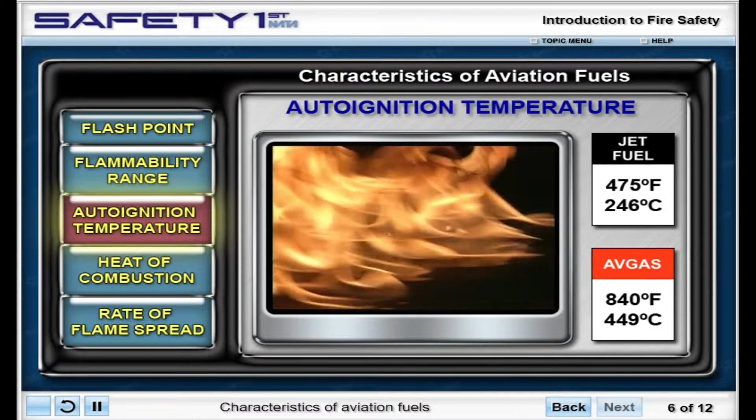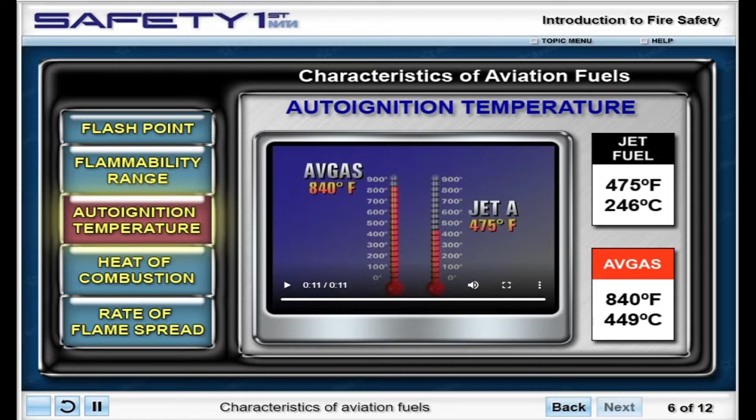Autoignition is the temperature at which fuel will automatically ignite without a spark or outside ignition source. The autoignition temperature for most avgas is 840 degrees Fahrenheit or 449 degrees Celsius. Jet A autoignites at 475 degrees Fahrenheit or 246 degrees Celsius.

There are a number of components on or near an aircraft that can generate temperatures high enough for autoignition to occur. It is important to ensure that fuel or fuel vapors cannot touch any surface or device that is at or near the autoignition temperature of the fuel.

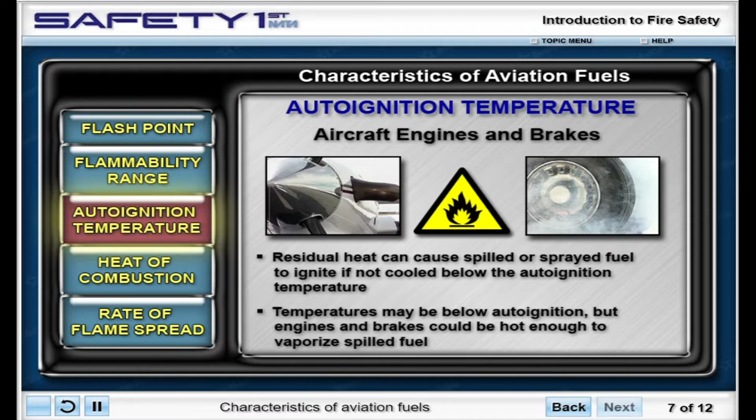The residual heat present in engines and brakes can cause spilled or sprayed fuel to ignite if they have not cooled below the autoignition temperature. The visual appearance of aircraft components is seldom a good indicator of temperature. Therefore, consider all surfaces to be above the autoignition point. Even when the temperature has dropped below the autoignition level, the engines and brakes may still be hot enough to vaporize spilled fuel. All ignition sources, such as static electricity, become extremely hazardous in the presence of flammable vapors.

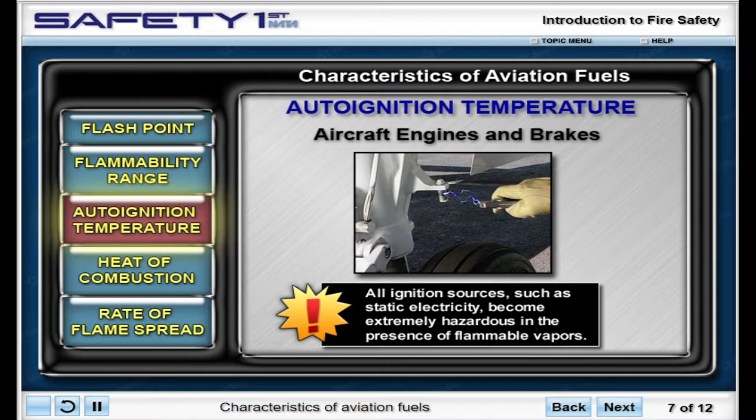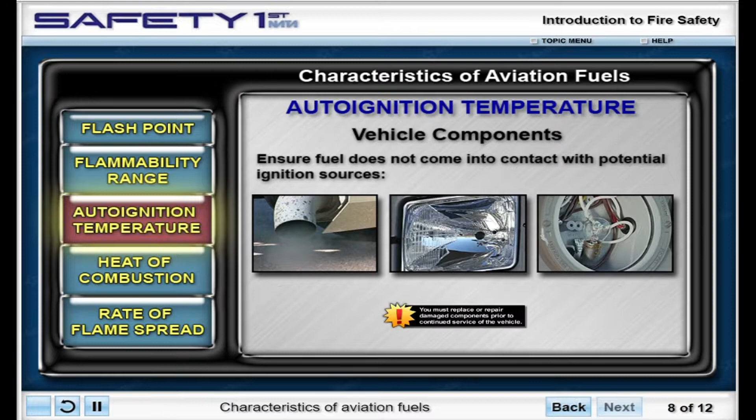Vehicle components, such as exhaust pipes and manifolds, are potential sources for autoignition of aviation fuels. Leaking or spilled fuel in the presence of hot engine components can ignite. Similarly, uncovered or broken lights and light fixtures create an autoignition risk. Therefore, it is important to ensure that fuel or fuel vapor cannot come into contact with any surface that is at or near the autoignition temperature of that fuel.

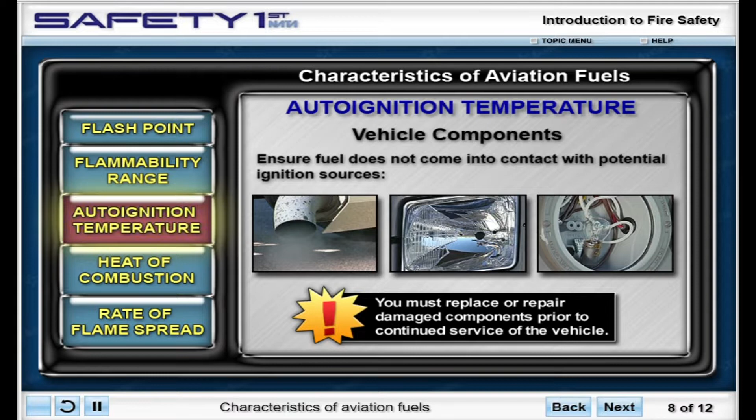The heat generated from the combustion of fuel is an important consideration when preparing to fight a fire. Heat is measured in British thermal units, or BTUs, where 1 BTU is the amount of heat required to raise the temperature of 1 pound of water 1 degree Fahrenheit. Avgas produces approximately 19,000 BTUs of heat energy, while jet fuel produces slightly less.

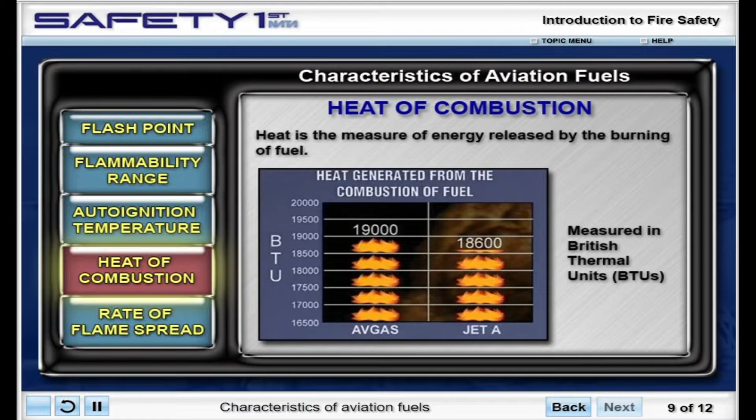Rate of flame spread is the speed at which a flame travels across the surface of a body of fuel. Avgas has a rate of flame spread that is 30 times that of Jet A. This is an important factor to consider when evaluating the severity and potential fire hazard of a fuel spill. More importantly, it is a factor that can affect your ability to fight or control a fire. Simply put, an avgas fuel spill, once ignited, can turn into a raging inferno in an instant.

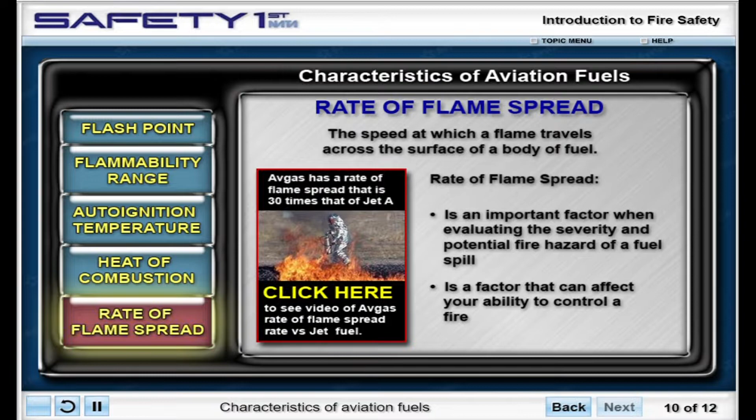There is a marked difference in the rate of flame spread of Jet A and avgas. Avgas has a rate of flame spread that is approximately 30 times greater than Jet A. This is an important factor in evaluating the severity of the fire hazard of a fuel spill, and is also a factor which will affect your ability to control a fire.

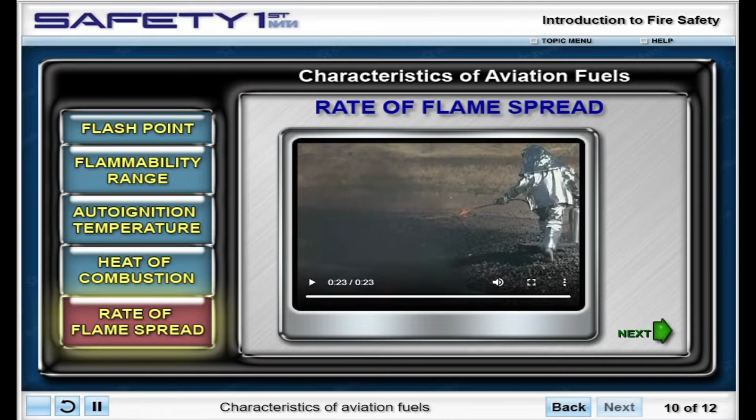The slower rate of flame spread of Jet A applies to jet fuel in its liquid form. Jet A and avgas essentially have identical rates of flame spread when they are atomized and released as a mist, or have been heated to a temperature at or above their flash point.